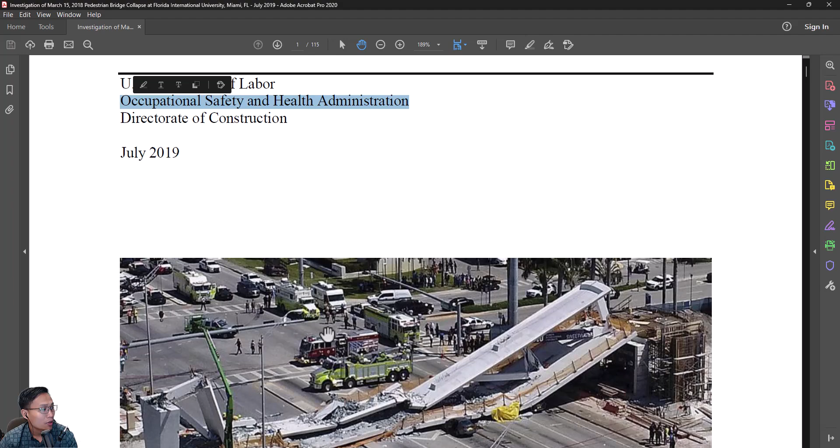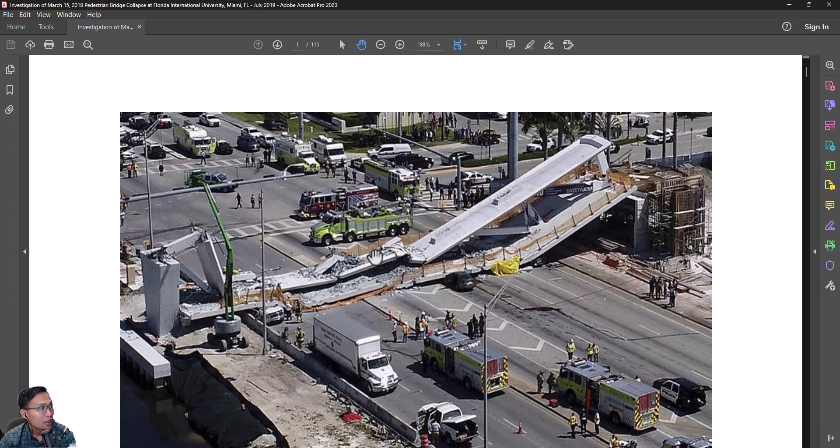All right, so the correct answer is that OSHA is the author of the report. Specifically, you have Mr. Ayub over here. He is the one that prepared the report. However, he is just the representative in the report. There are probably many other people who contributed to creating this report. So the correct answer for this one is OSHA. OSHA stands for Occupational Safety and Health Administration.

Question number 2: when and where did the accident happen? So if you take a look at the report, if you read it carefully, go all the way down into the detail here, you can see that this is the time it collapsed, and the location is in FIU, Florida International University.

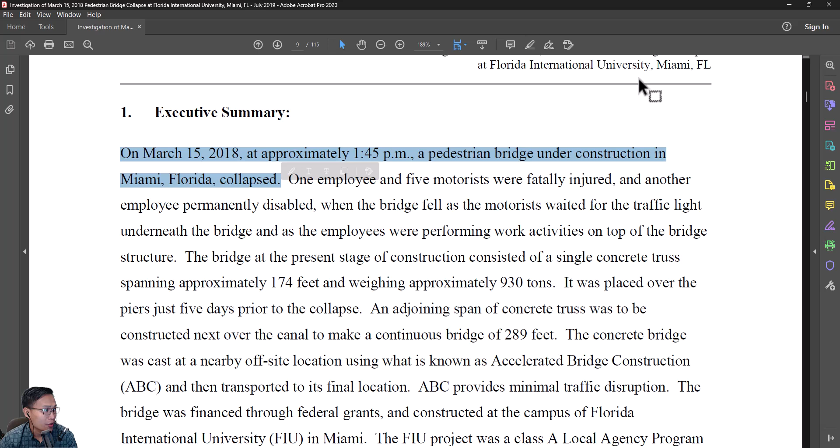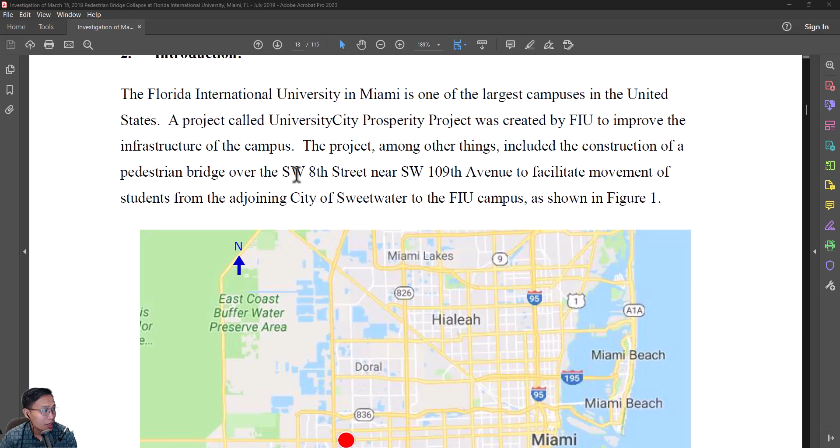Next question is how many people got injured or died, or what are the consequences of the accident? So if you read over here, you can see that one employee and 5 people died, and another employee is permanently disabled. So this accident is very serious and killed lots of people.

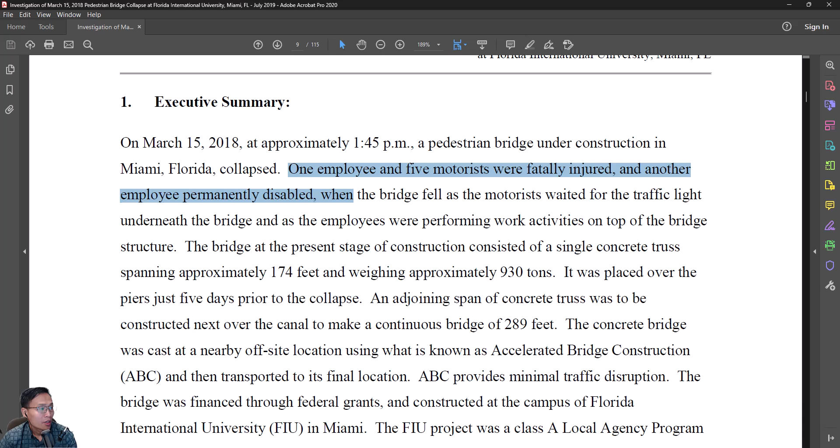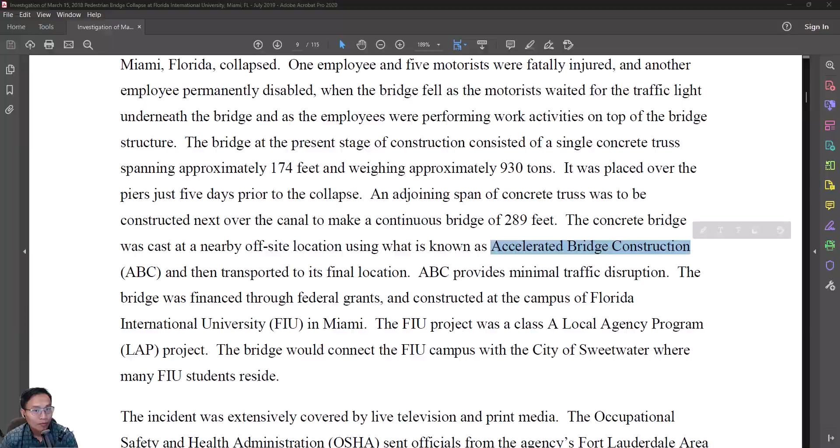Next one is: what is the construction method applied in the project? Briefly explain the idea of that method. So if you read here, you can see that the method is called ABC, or accelerated bridge construction, which means the construction will be accelerated. It will provide a shorter schedule. Let's take a look at the video over here, and then you can learn better about the ABC method.

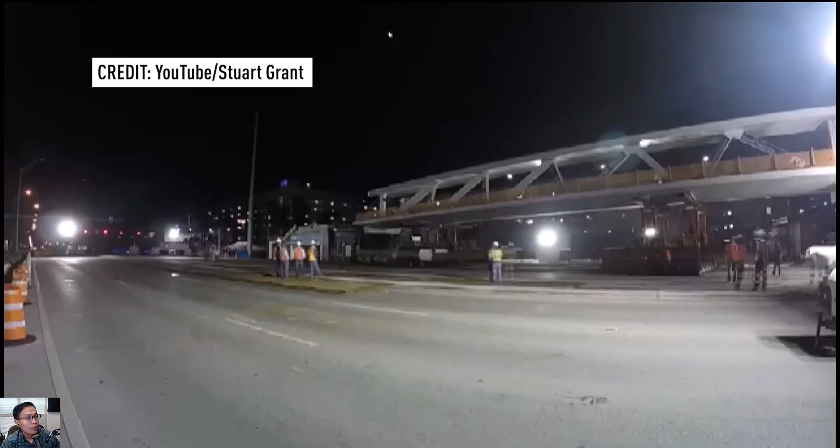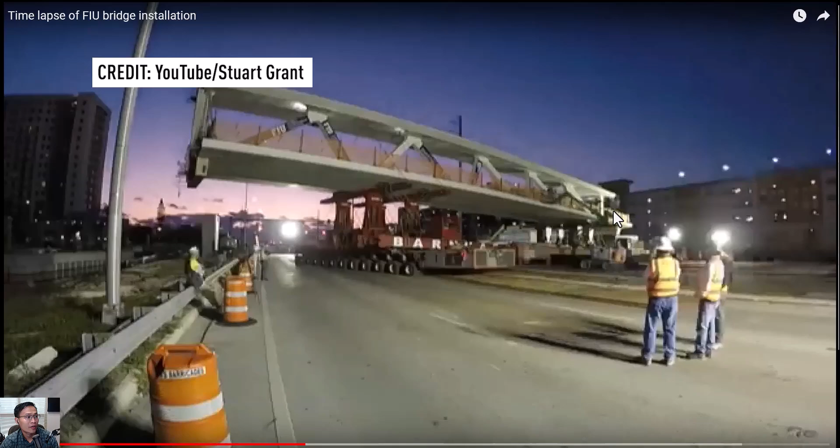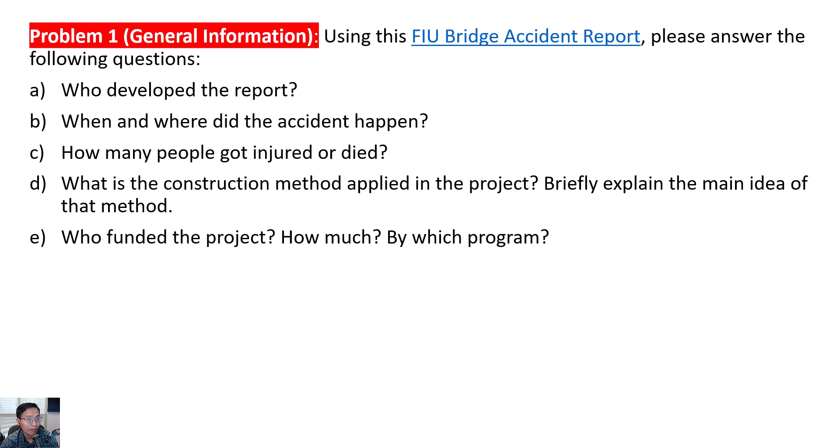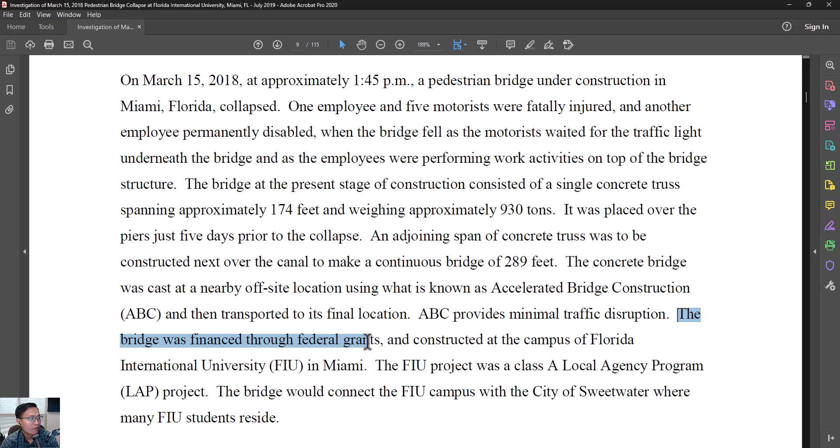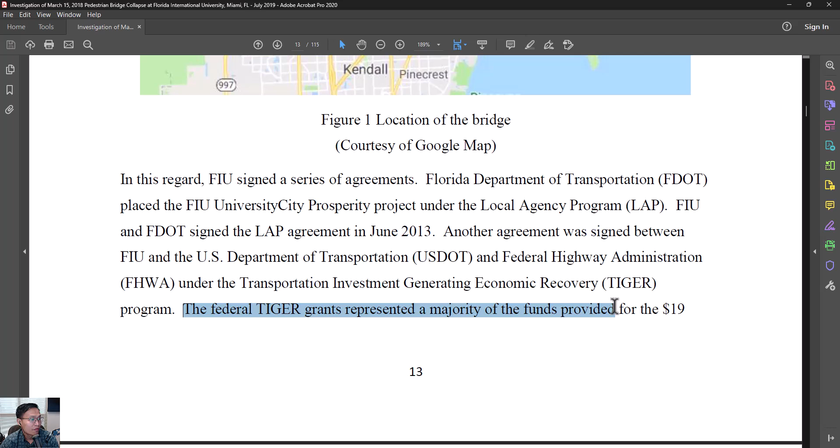Next question: who funded the project, how much, and by which program? If you look at the same page, page number 9, here you see that the bridge was financed through a federal grant. And if you look at page 13 over here, you see that the federal grant TIGER funded the project with $19 million. What is TIGER? TIGER stands for Transportation Investment Generating Economic Recovery.

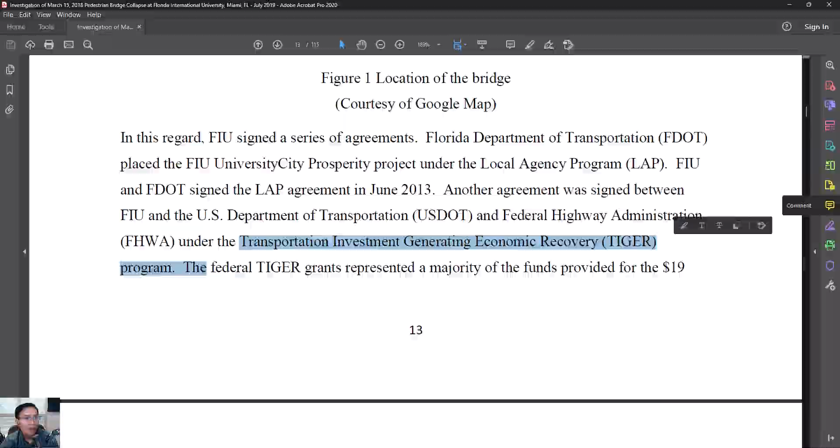If you check the website of the Federal Highway Administration, you see that TIGER is over here. That is Transportation Investment Generating Economic Recovery. This one started under the Obama administration. After that, it changed its name to Better Utilizing Investments to Leverage Development, abbreviated BUILD, under

the Trump administration. And then under the Biden administration, it changed its name again to Rebuilding American Infrastructure with Sustainability and Equity, RAISE. So under each presidential administration it changed the name, but the objective is the same: to fund infrastructure development in the US.

Question number 2: using the same report, who are the owner, the GC, and the designer of the project? If you go all the way to page 16 over here, you can see that the owner is obviously FIU, Florida International University. The GC of the project is the general contractor. This is Munilla Construction Management, abbreviated MCM. The designer is FIGG, or FIGG Bridge Engineers. So we have designer, GC, owner.

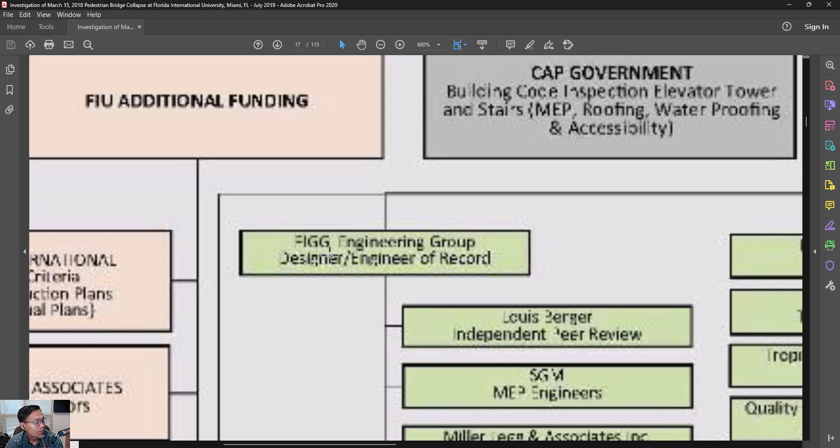If you look over here, you can see that this one is design-build. FIGG is the engineer or the designer of the project. FIGG reports directly to MCM, Munilla Construction Management. They are the design-build company.

After they are done with the design, they return it to the owner. The owner will call for bids, and multiple builders will bid on the project. Finally, the owner selects the builder based on qualification and low price. The builder takes care of the construction based on the design the architect or engineer came up with. If something is wrong with the design, the architect or engineer takes responsibility. If the design is correct but the construction has a problem, the builder takes responsibility. So this is design-bid-build, which is very common in the industry right now.

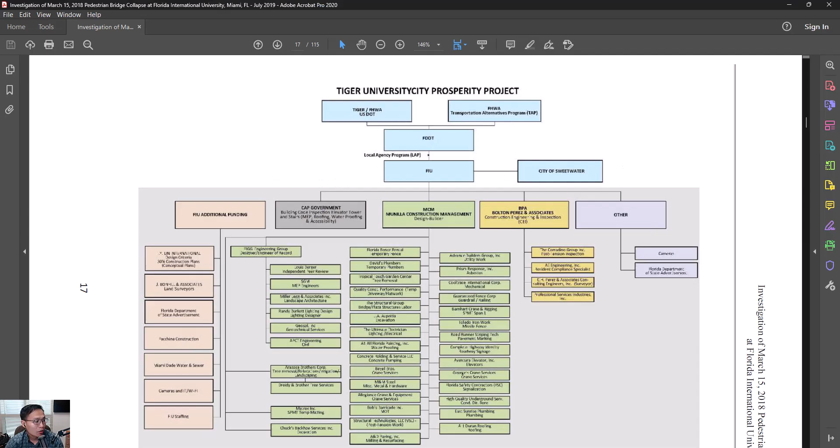So you can see over here, because MCM is the design builder. So without reading the report over here, I know immediately that MCM will be in charge for this accident. This accident happened regardless of the fault of MCM in construction or FIGG in the design.

However, if this one is design-bid-build, if we have an error in design, then FIGG will take care of that responsibility. If we have an error in construction, MCM will take care of that. However, this one is not design-bid-build. This is design-build. You see the design builder over here. So MCM will take care of everything that happens in this project.

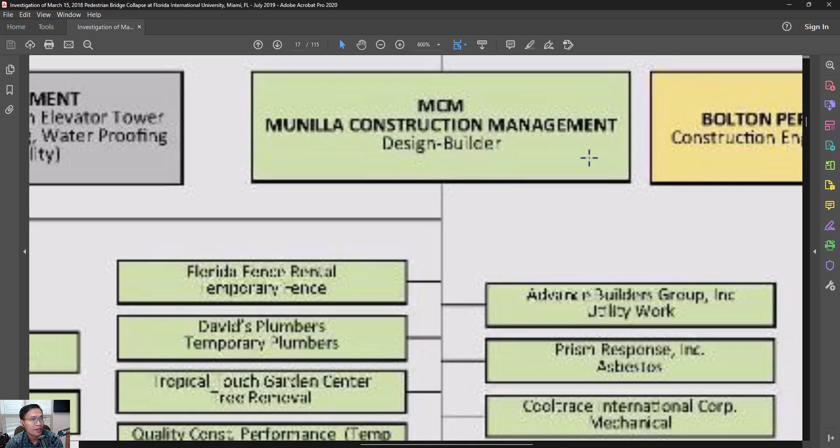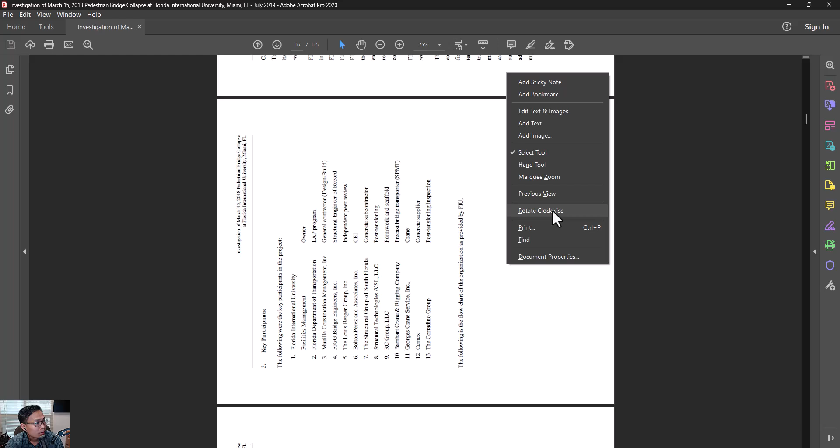Next question: who are the main players of the design-build team? If you guys want, you can copy the whole page over here. They are all the main players of the project. So we have the Louis Berger Group as the independent peer review.

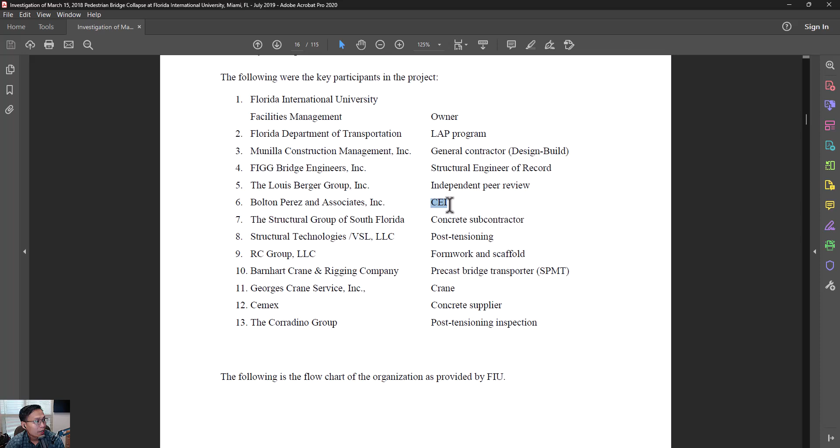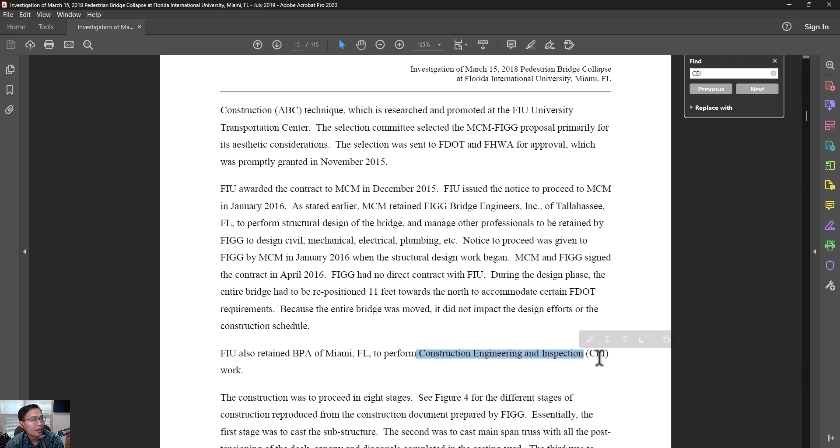The Bolton Perez, BPA, over here is the CEI. Let me check what the abbreviation is. That is construction engineering inspection. So this guy is the inspector. This is the subcontractor. This is the post-tensioning subcontractor. This is the formwork and scaffolding subcontractor.

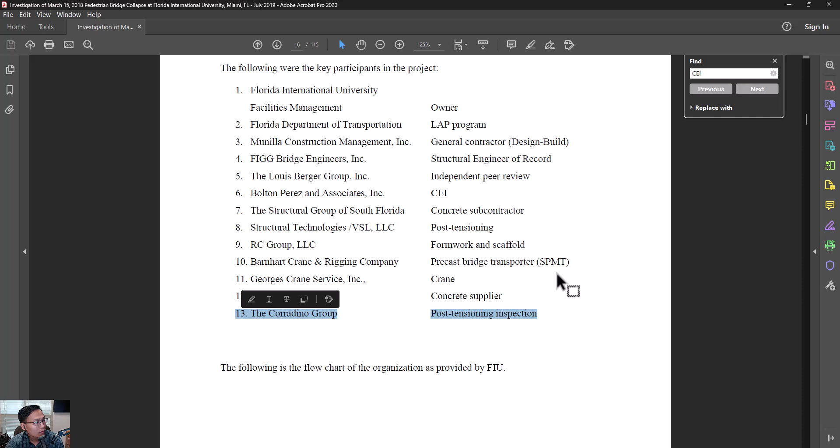This is the precast bridge transporter subcontractor, crane subcontractor, concrete supplier, supplier, Corradino. Corradino is post-tensioning inspection. So we have two inspections over here. BPA is in charge of the overall inspection of the project, and Corradino is in charge of the post-tensioning inspection. All of these are the main players of the project.

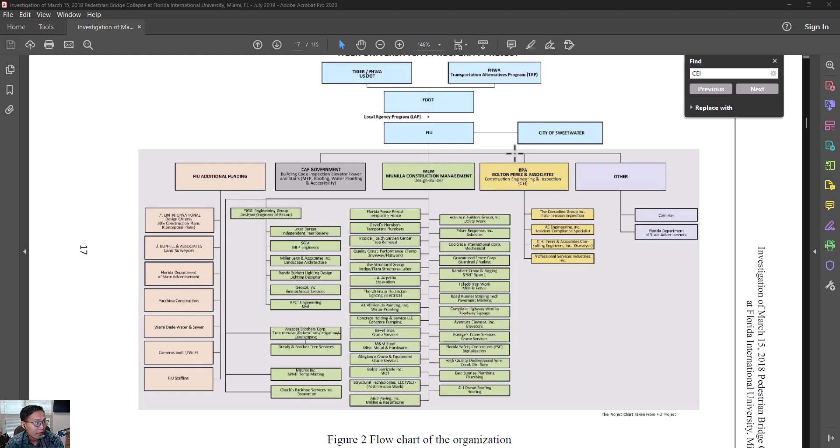Did FIU hire any third party to check the work of the design-build team, and who? So you can see over here the organization diagram. FIU hired BPA. BPA is the inspector. They don't report to MCM. Instead, they report directly to FIU. They are an independent inspector, and they work directly with the owner.

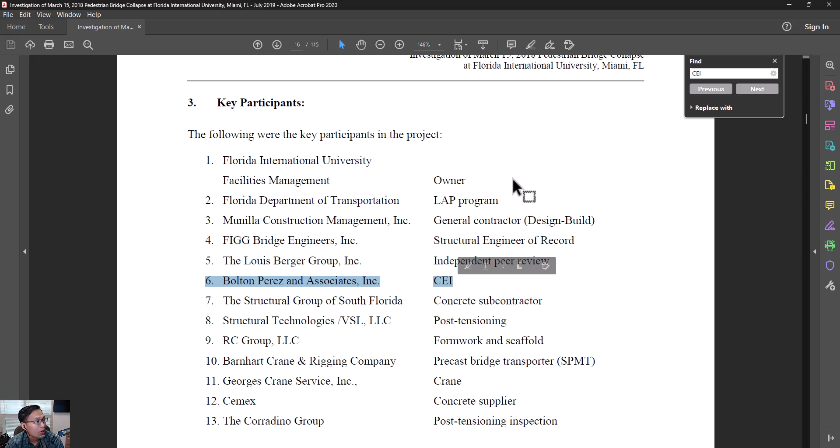Why? Because over here you see that the owner signed one single contract with the design builder. So all the communication, all the information, the owner can only know from the design builder. If something is wrong and the contractor tries to hide that, the owner will not know. So therefore they need to hire an independent inspector to take care of that, and that is BPA.

Next question: how many construction stages are there in the project? What are they? And in which stage did the accident happen? So if you take a look on page 19 over here, you can see that we have 8 stages. Stage 1 is substructure casting, which means they build the foundation, the piers, everything like that. Stage 2 is superstructure precasting, which means they build the bridge on the side, similar to the video that I showed you previously.

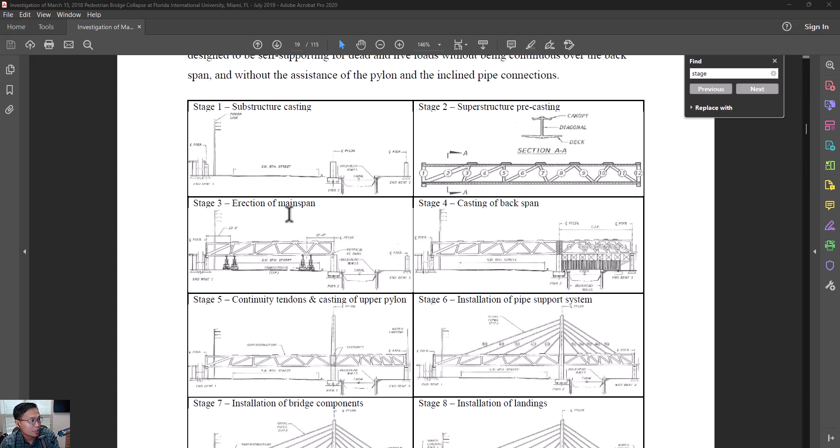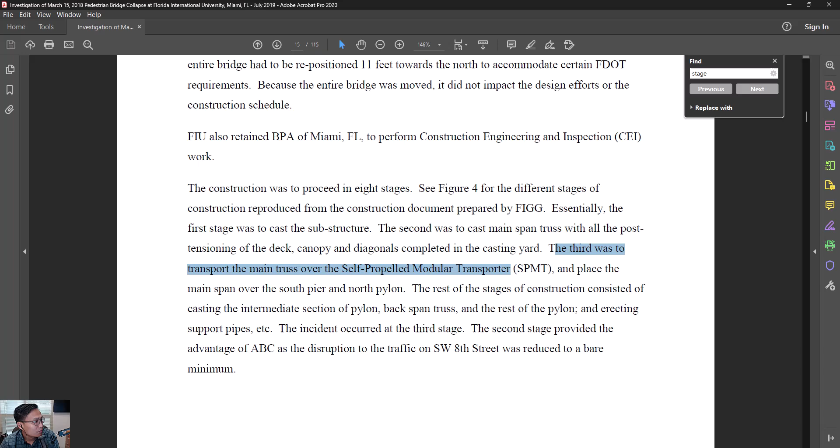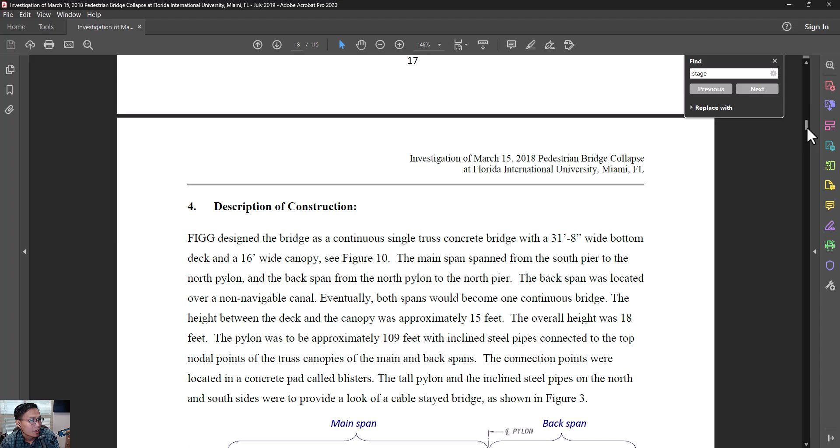So they cast the bridge on the side, and then they erect the main span of the bridge. This is the stage where the accident happened. How do I know that? If you look all the way up here and read carefully, where is it? You can see over here the incident occurred in the third stage. The collapse happened in the third stage. So the answer is we have 8 stages, and the accident happened in the third stage.

What I want you guys to do is document what we discussed so far. You can type it or write it and take a screenshot, and don't forget to submit it into the worksheet.